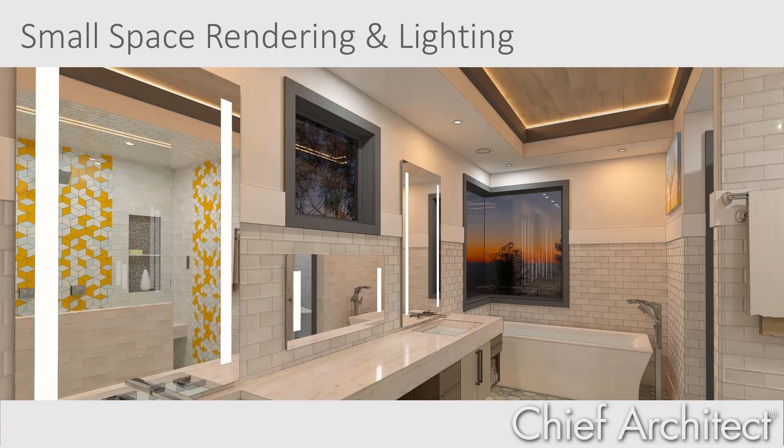In this session, I will cover how to visualize and render small spaces, and then how to use lighting in these spaces to achieve your best rendering results. The tools I will cover are the Floor Overview Camera, or what I call the Dollhouse View, Hide Exterior Facing Items - a camera setting that will hide walls and items attached to the walls, like cabinets, doors, and windows - setting the camera's field of view to be wider, and finally using the 3D cross-section slider.

I've opened up two different sample plans. One is a very small set of rooms, and the other is a larger house. I want to show you the differences as you navigate between looking at a larger plan and then trying to visualize smaller spaces, and how that may be different for just the smaller space itself.

I'd mentioned using the camera view tool, which is the perspective floor overview, what I call the dollhouse view. This camera allows you to tip down and rotate around and see exactly what is going on in the design. You can move between rooms pretty freely and tip the view to get the exact view you're after. Let's look at one particular feature in this camera setting as I move back over into the larger floor plan. We'll use the same camera tool and the perspective floor overview dollhouse view.

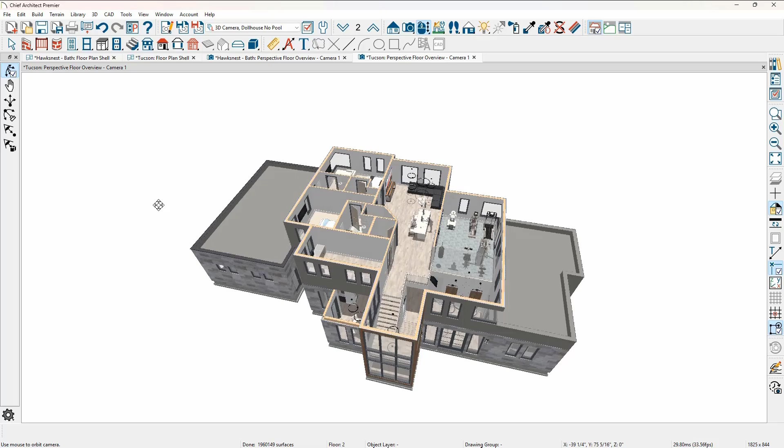Now I've opened up this view. It's on the second floor, and the default with this camera is to show the floors below. If you want to mask that and only see the current floor, I'll go up to the Edit Active View tool, and toward the bottom of this dialog underneath the Options area is the setting to show lower floors in the overviews. When I turn that off and close the dialog, this will mask out and prevent the lower floor from being displayed. You can see this is an open below room, and it's a setting you may find helpful as you're using the perspective floor overview tool.

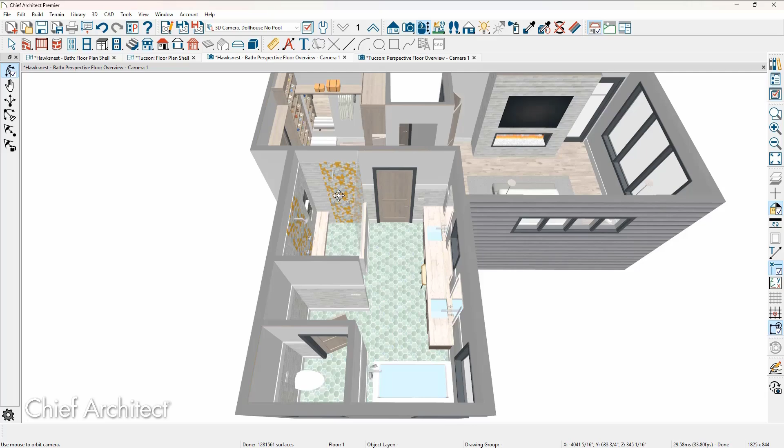Now the other setting in this camera, as we move back over into the small plan, is to hide exterior facing walls. Some of these rooms are pretty small. I have a water closet down here and it's pretty difficult to see into this space. So one of the settings you can use in the Edit Active View, again towards the bottom of the Options panel in the camera setting, is to hide the exterior facing items on those walls. What's going to happen here is anything attached to the wall - electrical, cabinets, windows, doors - will be hidden as you move your view around.

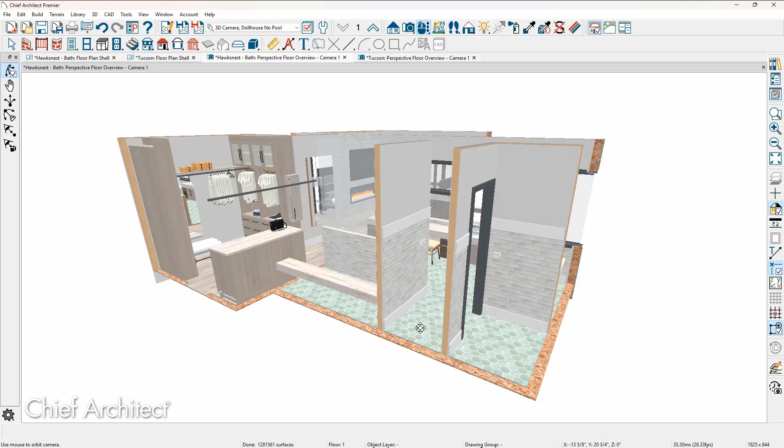So as I slide this view around, every time the camera is facing that orientation, the walls are hidden and anything attached to that wall will be hidden. If it's not attached to the wall, you may see something larger, like this cabinet over here. That's actually on an interior wall, so it's not going to be hidden.

It may also not be attached to the wall. So if you have something not attached to the wall, it might be a polyline solid or some 3D solid you have on there - it may not be attached. In fact, as I rotate around and look at the back of the bedroom set, this is a solid from the bedroom set, and it's not attached to the wall. Also, you see a couple of strands - these are LED lights and moldings. Those are not actually attached to the wall. You may need to put those on a different layer so they don't display.

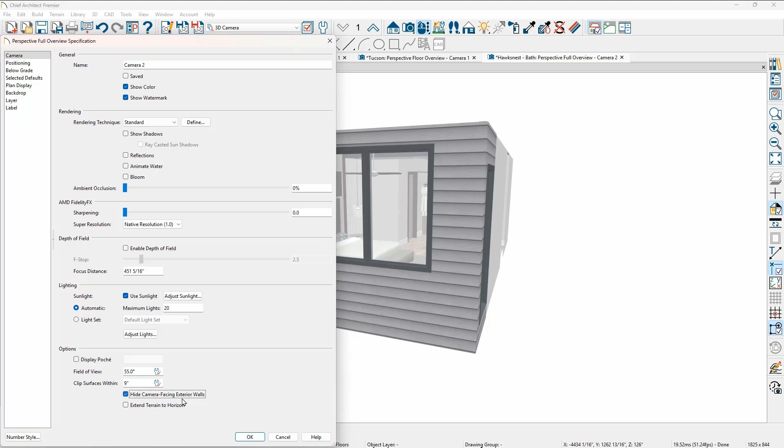Now let's go back into the floor plan view and use the camera that is the full overview camera. For this one, I'll make the same setting, which allows me to then see the ceiling. So back into the camera settings under Edit Active View, we'll turn on the Hide Camera Facing Exterior Walls. As I zoom a little closer in, you can now see the ceiling portion, and it has a little more context to what the scene is showing with the ceiling on.

Let's rotate around a little bit. Again, as I rotate the camera, anything touching the wall and attached to the wall will be hidden. Since I'm using the overview camera, you can see the ceilings in here, where it does have a ceiling. Some of these rooms have soffits, and so there is no ceiling over the top of it.

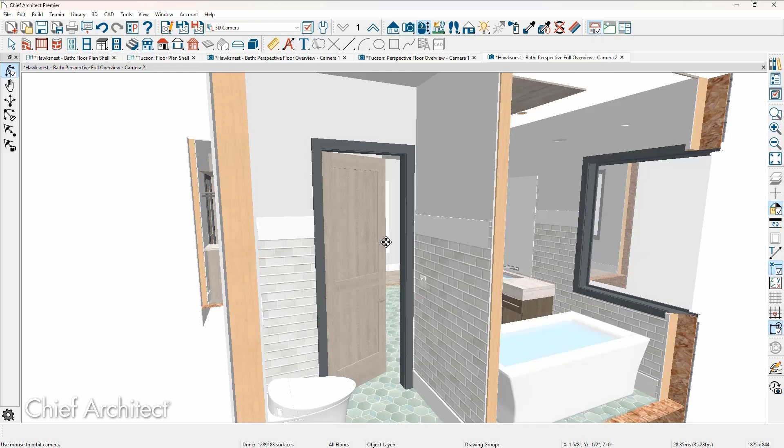And it allows you to be able to get right in there and see the view. If you want to do an export of this, you can save the camera as well. It will save those settings, and then you can capture just the right view for that room scene.

Let me close these views. I'm going to use one more camera, the perspective full camera. I'm going to come into the bathroom and click and drag toward the bathtub. In this session, I'm just using the standard render camera. I want to be fast and efficient with this. Now in the 3D view, I'm looking at the room scene, and it's a smallish room.

One of the settings you can adjust is called the field of view. Let's move back over into the floor plan view so you can see what I'm talking about. With the field of view, you can see the camera, and when I highlight it, there are two lines shooting out from the camera—that's the field of view setting. I believe my default is set, so let's open up that camera.

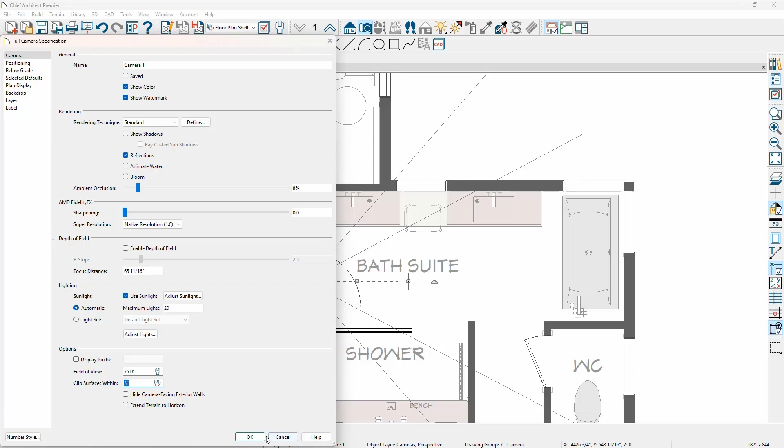I'm going to use the open object camera, and on the camera panel, I'm back underneath the options area. The field of view can be changed. My default is at 55 degrees, which gives you the display of those lines coming out. If I change the field of view, let's adjust it to 75, you can see the adjustment of those lines in the field of view.

When I double click on the camera, that will widen your field of view, and you may be able to see more into, in this case on the right hand side, the shower, and you may be able to see more of the mirror on the left hand side.

If I go back in, we can do the same edit. Let's use the edit active view and adjust that to maybe a full 90 degrees and take a look at what that change looks like. This is about as wide as I can make this field of view, and now I can see pretty much everything from the face of that door into the room. So the field of view may allow you to get the room scene you're after. The view might look a little bit distorted, but it depends on what you're after. The field of view setting can be helpful.

The next tool I want to talk about is using the 3D cross-section slider. In this smaller plan, let's use the camera for the perspective full overview. I find this camera setting, the cross-section slider, to be a little more helpful in larger plans, but it also works in smaller plans. Let's look at the camera view options, and the tool I want to use is called the cross-section slider. Let's just move that over to the side here.

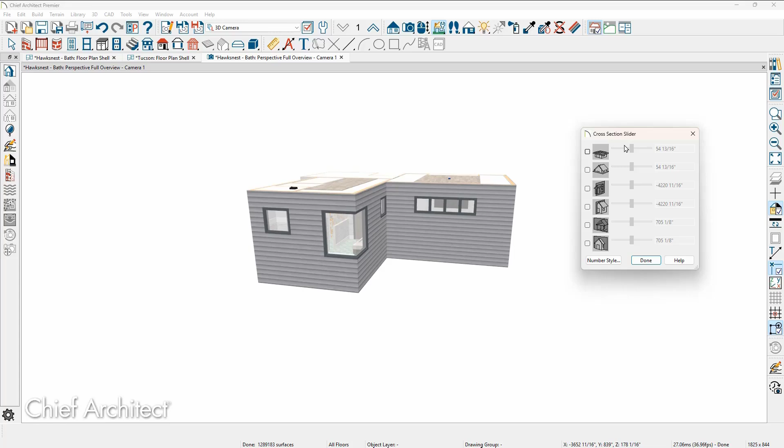This allows you to slice and dice the model in six different settings. I've just clicked the top one here, and then you can use the slider to adjust this—maybe you're trying to do a reflected ceiling plan. I'll click another one where we can pull that over, slide that around, and pull that back. Now with that cross-section slider, you can get right into the room or area you want using that slider. As you move and pull these apart, you can get exactly the room scene you may be after.

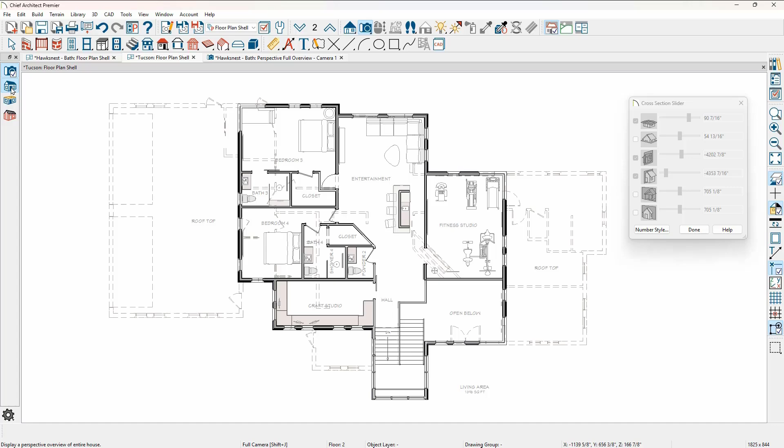Let's go into the larger plan and look at using the same tool. Now as I switched plans, notice the cross-section slider is still up. This is a persistent dialog, so it's modeless and will always be here until I actually close it. So let's use the same camera tool here—let's use the full overview camera. And here's our model, again with the cross-section tool slider.

Let's adjust that. We'll come up so we can see just the beginning of the floor plan at the top, then tip that down so we can peek inside. This is a nice tool I find useful on a little bit larger plans, but you still want to get in and see tight spaces. Again, each one of these settings, as you click and pull these around, you can make the adjustment and then see into those spaces. You can turn on different layers.

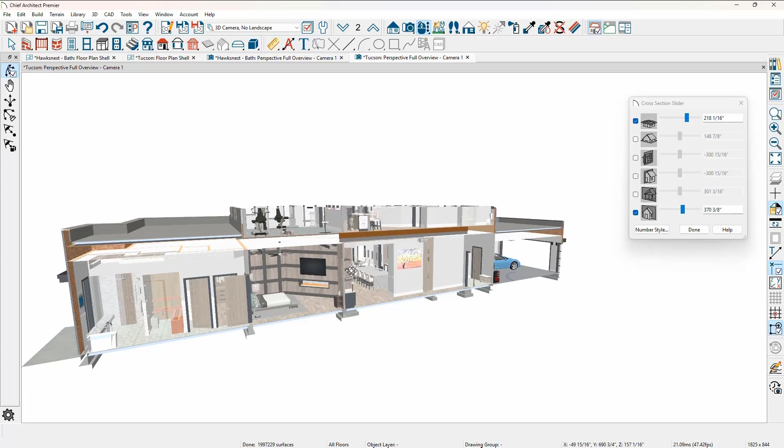You can see the cavity inside here. Turned on the framing, you'd be able to see inside of that with the framing turned on. It's all layer based and allows you to get just the right view using that cross-section slider tool.

Now there's one more setting I want to show you inside of the camera setting itself. As you're zooming in and getting really close to an object, let's see if I can get this to clip right inside the bed. You see how the clipping looks a little odd when I get close to that bed?

I like to take my camera setting and open up the Edit Active View tool. There's a setting, again I'm on the camera panel, underneath Options, for the distance to clip your surfaces. I usually set that pretty low, I'll set that to 1 inch, and that allows me to zoom really close to an object.

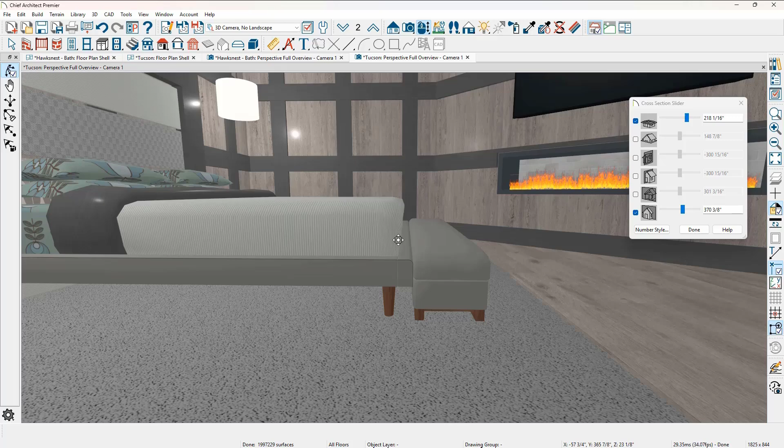Let's see if I can zoom in here and get a little bit closer to that bed, see how close I can get before it starts to clip. So I can get much closer to objects before it cuts inside of it. Especially like in a kitchen where you're looking at cabinets and you want to get close to an object, that clipping within 1 inch seems to be a good setting, and that's what I typically will set my defaults for my cameras.

So these are the tools that I use, and I'm going to go back into the floor plan. I usually create a layer set for all of my cameras. You can access these inside of the project browser as well.

As you come over into the project browser and you're looking at, I have the bath plan open, and here's my cameras for the first floor. You can access those. I sometimes turn these on in a layer set so it's easy to grab these cameras. I've got a handful of cameras in the bathroom, and if you want to peek at these, let's open up each one, and I'll close the project browser so we have a little more real estate. Let's open up the camera that is on the left hand side.

Let me double click on that, and that'll take a second. This is a physically based render to resolve the rendering. So I'm using the camera approach where I can pull the camera very near the back wall, and if you look at the Edit Active View settings, on the options you can see my field of view is 55 degrees and the clip surfaces at within 1 inch.

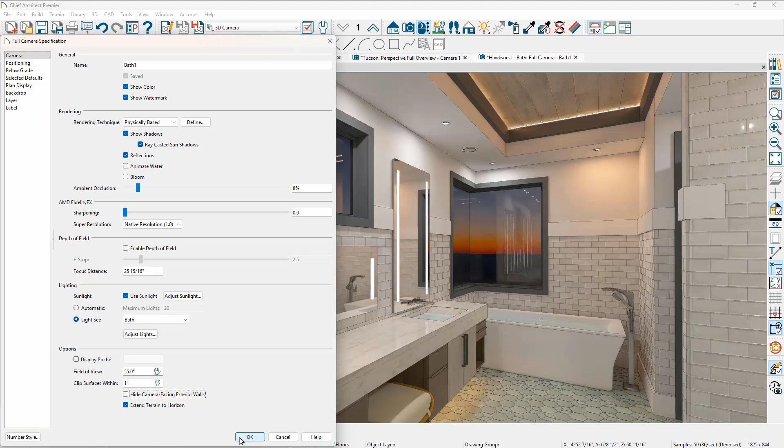And as I go back into the floor plan view, let's talk about that camera. You can move these cameras, and sometimes what I'll do is zoom in, pull this back, and make the adjustment. If I pull that back, you can kind of see where the field of view is going to start to intersect, and so I will use this and get it as far back as possible.

Let's grab one more camera. This one over in the opposite end of the room, it's pretty close to the back wall. I want to maximize the view.

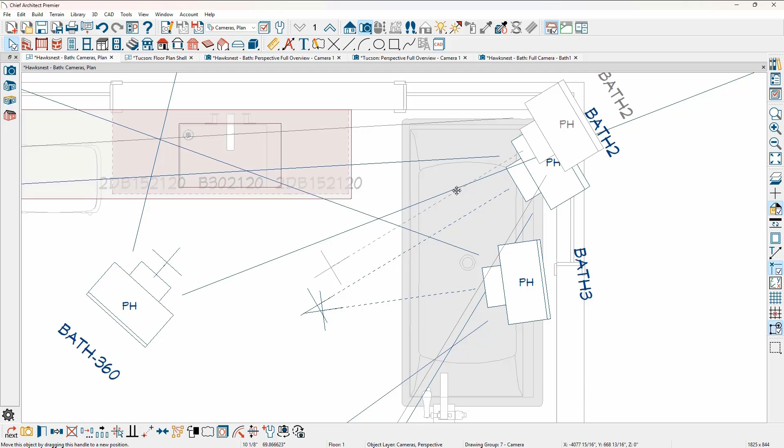To maximize that view, you can hold your control key down, or command key on a Mac, and get very close to the corner. That may be too close, but let's position this camera as far back as possible, then we'll open it up and that'll take a second to resolve. I can tell immediately based on the view, I'm still seeing part of the window, so the camera is too far into that corner window.

So to move that camera, you can use your arrow keys, the letter I to move in, so that will move the camera in. I find when I use those jumps that it moves the camera more than it needs to. So to get refined control, you can click on the camera, hold your control key down on a PC and command key down on a Mac, and that way you can position it if you just need to nudge it a little bit. We're still really close up here to the corner window.

Then when we go back into that camera view, we give it just a second to resolve. Now I'm just past the window. I might want to adjust the rotation here just a little bit to try to get the view around.

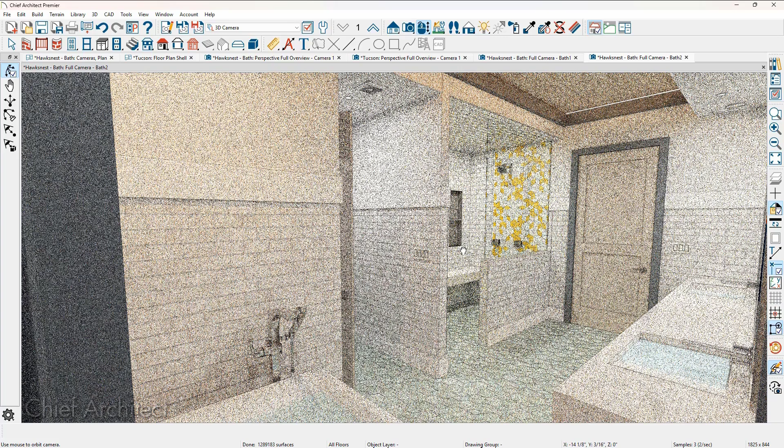I've got line drawing on, so it's a little bit more computationally intense. There's the view that I kind of want to maximize. You can adjust your field of view to help maximize your view. So those are all of the typical tips I use to try to get a rendering for a small space, and hopefully some of those will help you out.

As I shift gears and talk about lighting tips for small spaces, I'm going to do so in the context of optimizing for the physically based ray trace views. The same principles apply to the other views, like standard or clay ray tracing, but I'm going to focus on using these lights for producing the most photorealistic view.

The first thing I want to encourage you to do is create and use light sets. It's more important in a larger plan, so you can force the lights on for small rooms. Then make sure you adjust the light's intensity, the light color, and use area lights for non-light objects, maybe TV screens, fireplaces, etc.

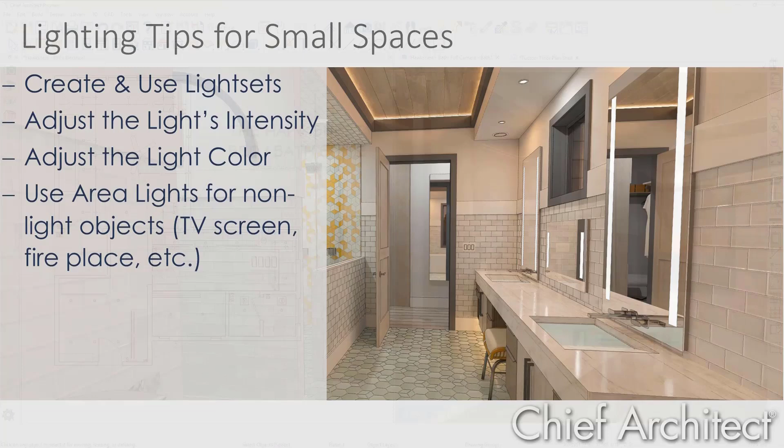In the split screen view I have open, the camera render is on the right hand side, and I have all of the electrical on the left hand side in the floor plan view. You can see most of the electrical in here. We have the recessed cans, lighting up in the tray ceiling, LED lighting below the cabinets, and also the LED mirrors. So these are the main light sources that are lit.

You have to have lights to get a reasonable 3D view, especially when using physically based ray tracing. If there's no lights, you're not going to see much in this room at all.

So I've done the electrical plan work in here, and as you zoom in and look at these items, the first thing I want to talk about is using a light set. Let me just click on this camera and use the open option.

On the camera panel, down in the lighting category, I'm not going to talk about sunlight so much, I'm going to focus more on the lighting information. Many of you probably use the automatic light setting, where you can set the maximum number of lights. This plan isn't overly large, but there are still probably several hundred lights in it because of the LED rope lights, which may have lights every inch or every 3 inches or some other interval. By the time you add those in, you get a lot of lights.

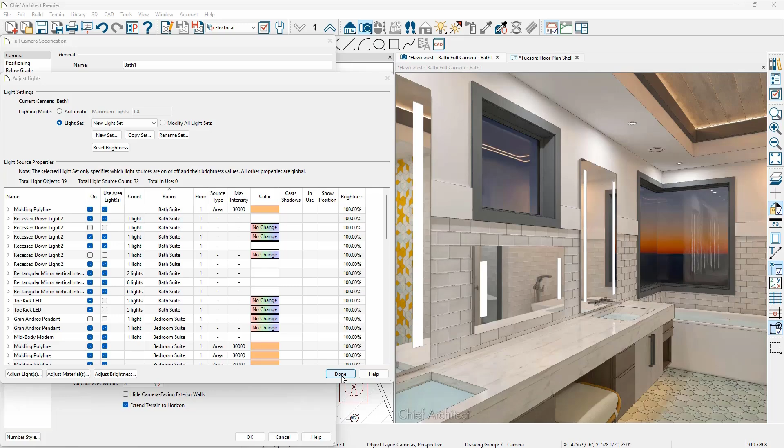So let's close these dialogues, and I'm going to maximize the 3D view here. And I'm going to begin with the light intensity, and let's just double click on this recessed light right here, kind of in the middle of the ceiling. And I'm going to come over to the light data information.

On the light data, there's a few settings: specify as light, use area lights. I'm going to talk a little bit more about area lights here in a minute. The light intensity for this light is currently set at 1200 lumens.

So I can adjust it. There's a drop down of different settings, and depending on how many lights, how high your ceiling is, you can choose the different setting. You're not restricted to these numbers - you can always type in a number exactly over here. If you wanted to have 1080 light lumens, then you can type in the information.

And then immediately below this is the color hue. Now I clicked on the light, kind of slide this over a little bit. I clicked on this light over here and it's white. Now if you look pretty closely at the view, if you can tell this on the stream of the session here, this light is not white. I've colorized it slightly.

Don't ask me why, but I felt like it was maybe a little bit more interesting than just having white. So for the purpose of the session, I've changed that to have a light orange hue to it, so it's casting a different light. The way you change that setting is right here. So you can come over here, you can make the adjustment, and if you wanted to yellow it - I've been using kind of a theme of orange - so I can make the adjustment in here.

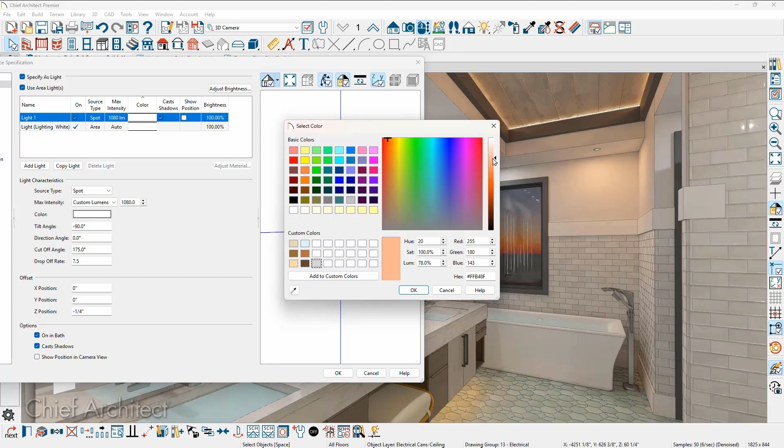We'll make this adjustment, let's make it a little bit more orange so this shows up. And I've now tweaked the light color. We'll see this when we close the dialog.

Now there's other settings in the lights that I'm not going to really cover. There's a help option down here, but your tilt angle, the direction, the cutoff angle, the drop-off rate - how much does the light drop off from the source - and using the help option down here will give you that information. Sometimes for troubleshooting you can kind of see where the light source is. Right now there's an offset of 1/4 inch, so the light is actually being produced from just below that. And if you turn this to show position on in the camera view, you'll see it in your 3D view.

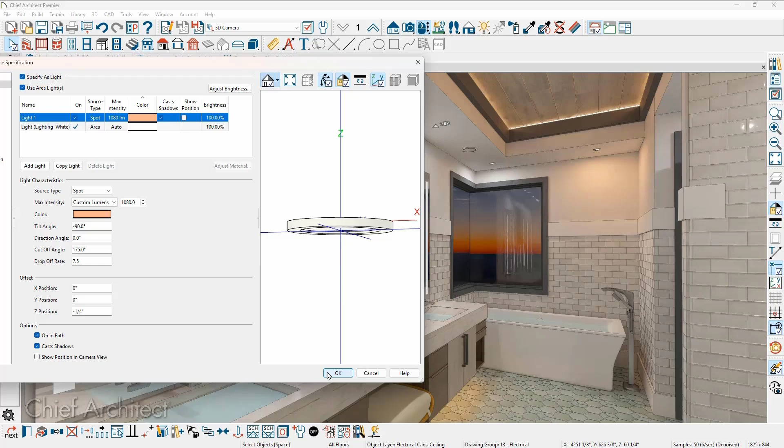Sometimes helpful in troubleshooting, especially if you have a long chandelier with multiple lights in it—it can be helpful to see what that is. So now that I've reviewed changing and setting the light intensity, one of the keys is when you take a 3D view, see how bright it is, and use that feature. Let's click OK and give that a minute to resolve.

You can also adjust the lights through a process called dimming. You can click on the light and dim it. I'll show you this—I know this circuit, as we look at the electrical over here, you can see it's actually using a circuit connecting all of my recessed cans along that section of the room. It's not hugely significant, but from the floor plan view I can click on that circuit. Difficult to see, but it's the switch on the left up here. Through the bottom edit menu is 'adjust brightness,' which is effectively like using a dimmer switch.

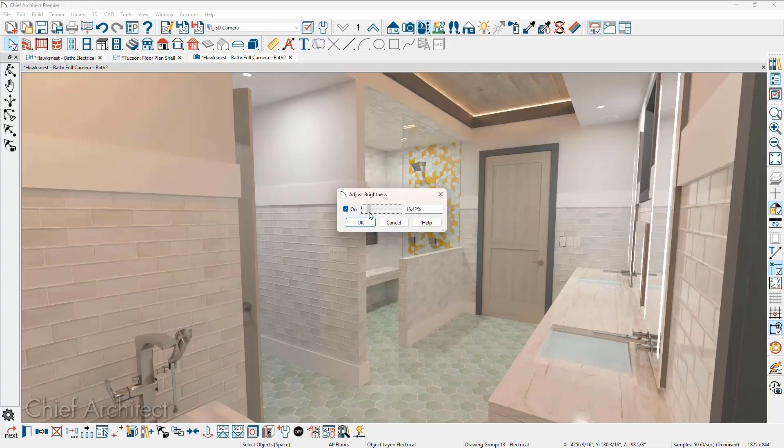If I slide that over—let's slide it down quite a ways so there's not a lot of light coming on—click OK and give it a second to refine the view. Once that's complete, the lights in this recessed bank up here are much dimmer than the other lights, which may help get the right scene. It's a nice way so I don't have to go into each light and tell it, instead of being 1200 lumens, it's 800 lumens. Using that dimming option can be fast, especially if you've gone to the effort of creating a circuit. So let me switch gears and close this view.

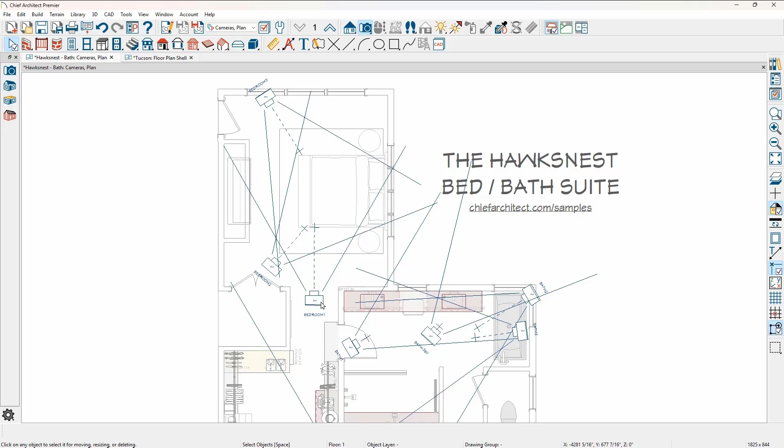Let me open this sample plan—I'm going to open a bedroom camera that is using some area lights. Let's double click and open this camera up. In this scene I'll point you to a few things that are area lights. One is the fireplace, which is using an area light and emitting light. The other thing emitting light that may not be as obvious is a vertical rope light.

Sometimes I get the question: how do you create a vertical rope light? Because the rope light tool, the electrical tool, typically only goes horizontally, which is what we may have up here. Sometimes you need the capability to create a vertical rope light. What that is, is a solid, and I've taken the materials and set them to be emissive. Let's explore that a little bit.

I'm going to use the Adjust Material Definition tool and click on that light, which again is a 3D solid. As we open that up, I'll go over to the Properties panel and point you to the emissivity setting. When you drop this down, similar to the lumens setting we looked at on the light, there are some predefined settings, and you can also type in a specific value for that information, along with some other settings you can learn about in the help file. So I've taken that material, which is just a simple orange material, and named it Lighting Orange because I want it to emit light.

On the Properties panel, I set it to an emissivity of 30,000. You may need to play with that a little bit and dial it in for your settings.

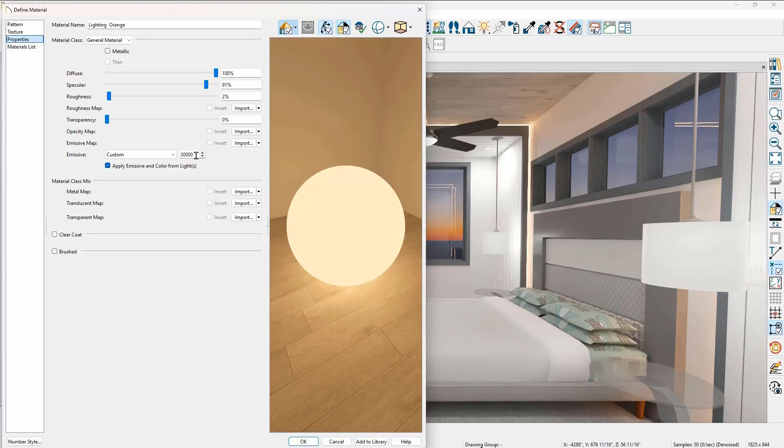Let's look at the fireplace, using the same Adjust Materials tool. I'll click on the fireplace over here. I've taken a 3D solid and used the image Fire 6 material name and painted that, and the emissivity of that is pretty low. Compare that to 30,000 on that vertical light, it's pretty low.

So I might mess with this a little bit, and let's crank it up so that we're cooking with gas here. Let's take a look at the effect on that room scene. So as that resolves, yeah, that's a bright fire. So the emissivity, that's actually emitting light.

If I were to turn off the other lights in the room, you're going to get quite a glow. It's a function of how many other lights are in there, and you're going to get quite a glow from the emissivity. It can be a nice effect using that area light for non-light objects.

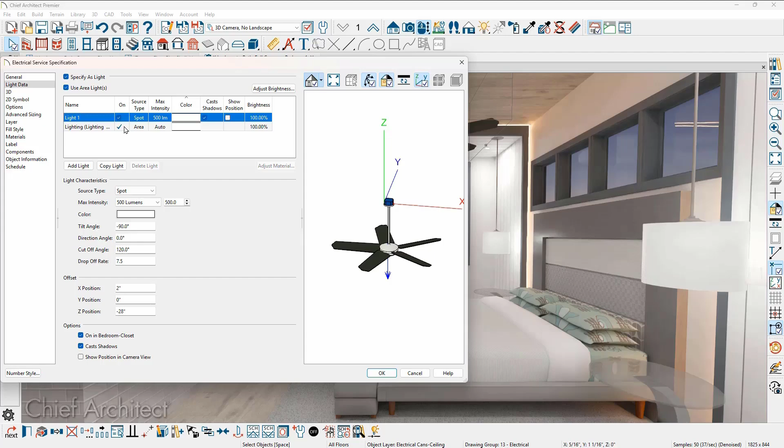Other light objects can also emit light if we pick on this fan light up here. This light is set up to use the light itself of 500 lumens, and it's also using an area light. Let's look at this again, 500 lumens, but the glass below it is an area light as well. If I go over to the materials, the materials are made up of several things.

One is this lighting glass. Let's select that material, and then I'm just going to use the edit button and look at this material. It's called lighting white, and over on the properties, it's applying the emissive color from the light itself.

So that means because that light was set to 500 lumens, the light data controls the amount of light in the area light, the emissivity setting based on the lumens. That's a nice setting. I usually don't override that and just let the program manage that for me.

So that wraps up the session that I have. Again, using lighting is really important for your room scenes. Remember to set the intensity, the color, and then for any of your rooms, build a light set. It just forces the program to render it.

Finally, area lights can add a little something extra into your renderings. Hopefully you'll find those tools helpful as you render your spaces, and in particular your small spaces. Thanks for watching.

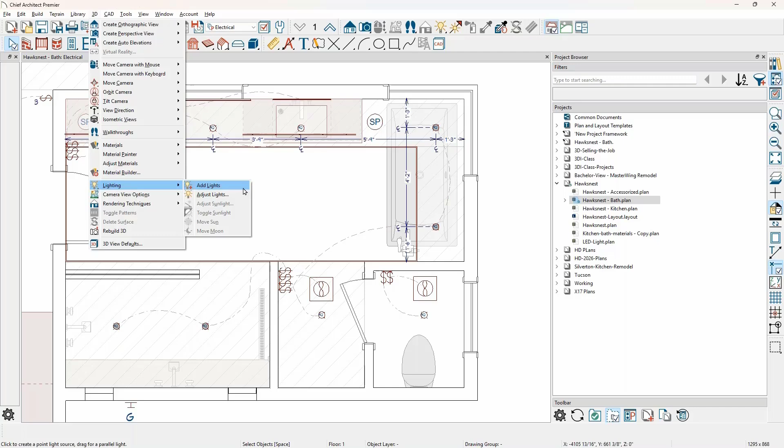Gosh, where is that? I haven't used one in a while. So underneath the add lights, I'm in this mode here, and this will produce a light. Also, if you click and drag, before you release, it will create a parallel light. But let's just place a regular light here.

And so this is a light. You don't see it in 3D, but it has all the typical settings. If I open that up, you can go into the light data and specify lumens and all of the light information as you typically would for a regular electrical light.

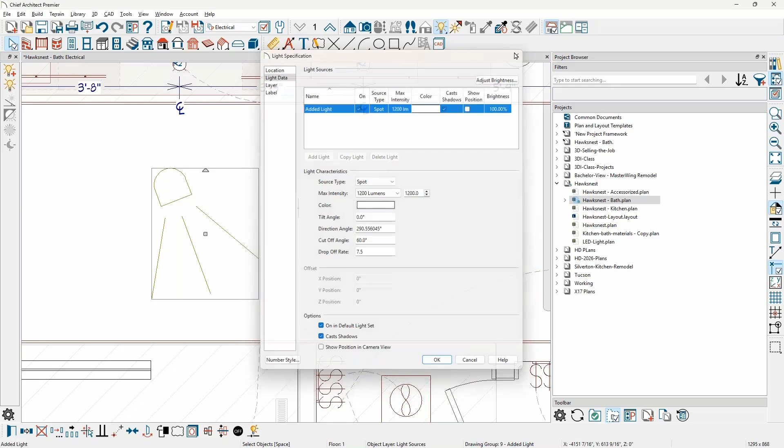I don't really use these anymore. I used to use these quite a bit for a scenario in what was called CPU ray tracing, but we've kind of gone away from that. Let me see if I have a good example here. I've gone away from that because I don't have a lot of need for those kinds of things. Let's see if I have it.

It was more of just like, hey, if you're telling us best practices, it seems like the answer is do real lights. Yeah, I pretty much use real lights, and I was trying to see if I had an example here.

While you're searching, I'll kind of hit my second one, which I think I know the answer on. I know when you're doing real lights, they all have dialogues that you can check a whole bunch of stuff. But when you do a panel light, that's what it was called, right? Like if you're going to make a TV be emissive.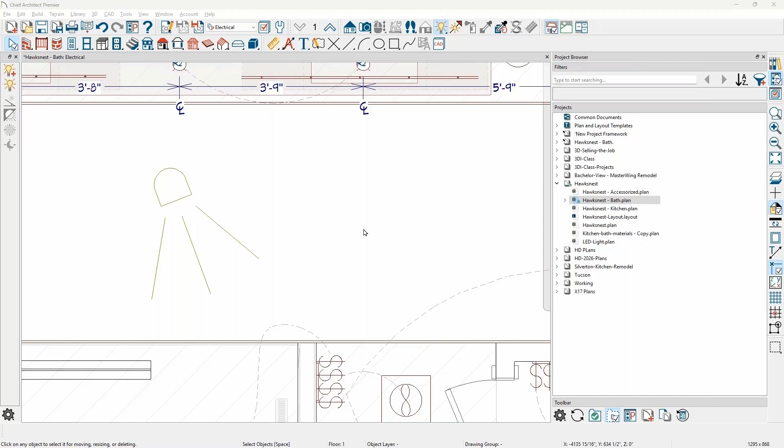Oh yeah, so yeah. Do they have a shadow casting option the way normal lights do? Let me open up this camera and see if I can open that up. Well, I'm not going to be able to find my other picture I was looking for.

Okay, so I don't really have a photo on that TV, right? And if I go in, let's grab a photo real quick, and let's see here. Or even the fireplace, yeah.

So if you click on these things, the main thing you get with the emissivity is the amount of lumens. So that's what I can control with that. Now there's some other map settings, but for the emissivity, this is what you have, is the ability to set a value for the emissivity.

So even if it's set to a super intensive emissivity, it doesn't cast a shadow. Right, okay, all right, cool. That's what I needed, thank you.

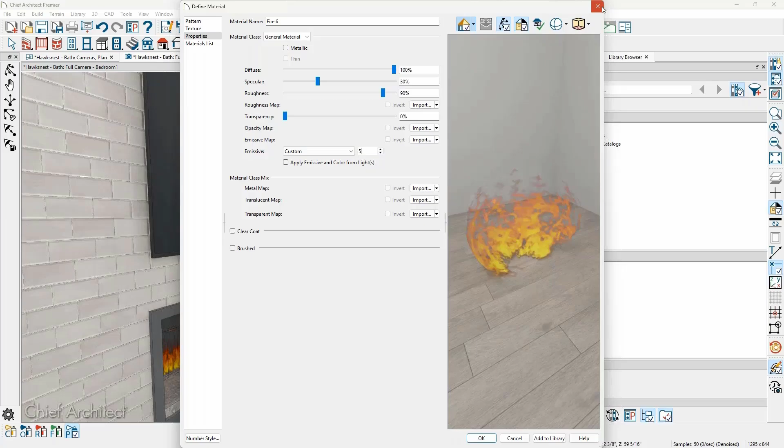Back to the light source question, I have a follow-up question on that. What is the trick to actually selecting that when you're in a room and you want to change it, or change the values of it? My experience has been that I pretty much have to delete everything that's on the floor to try and select that light source. I can't get to the middle of it, and it just wants to select anything else that is in the plan.

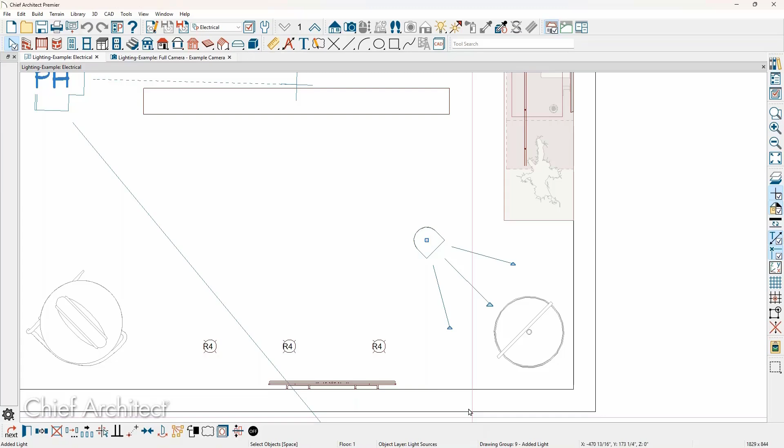So Anne Marie, are you talking about being able to select this light source right here? Exactly, yeah. Let me pull this over here. So I have a kind of lighting example here, and this was the one I was looking for, I think it was Brandon that called in. So I've got a couple of light sources here. One is just a light source that's in the corner, and one is casting a shadow from the light source. So sometimes it's difficult to select these. That one I happen to get easily, but when I move back over into the other plan here that I had open, it may be difficult to select it.

So I drew a marquee around it to select it. I also will simply go into the layer set and turn on the layer set that says all off, and then make sure I type in light sources. I've got some other things turned on, and now I can get it. Oh perfect, okay, does that work for you?

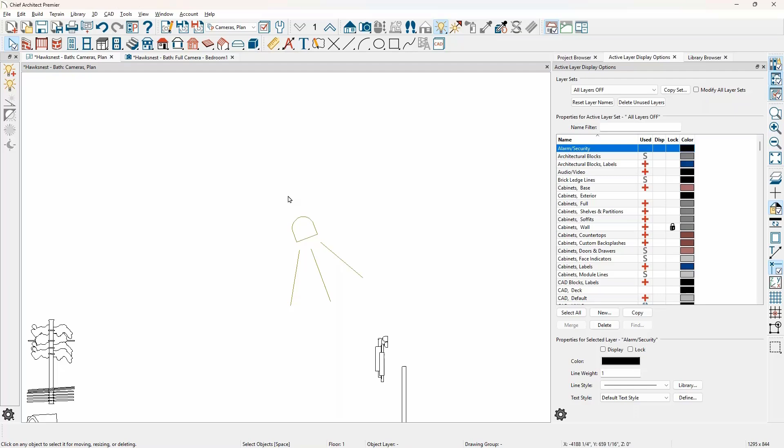Yeah, that helps. They can be hard to select. Yeah, I was doing a kitchen and I had a couple of light sources over an island type thing, and it was impossible to select. Yeah, it can be. So I use that all off layer set, and then I just turn things on and off as I need to. Okay, perfect, thank you.

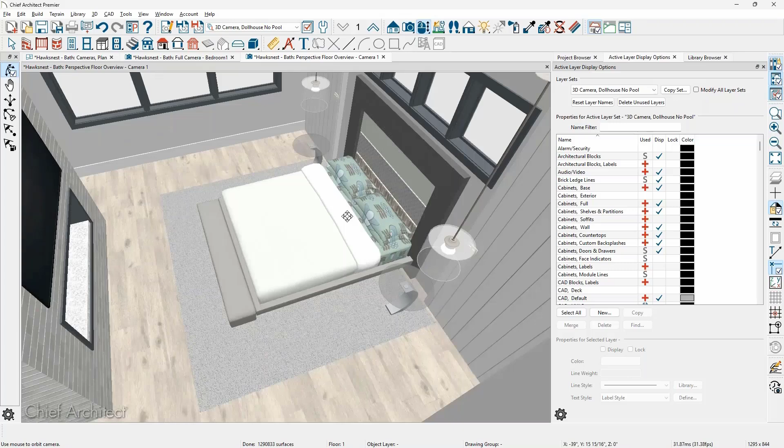So in this camera setting, when I click anything attached to this wall, if you peek inside this wall, there may be some electrical. There's electrical on the wall, right? So when you turn that camera setting on, which is under Edit Active View toward the bottom, hide exterior facing items, anything attached to that wall will then turn off. Now I'm using version X17, so there's a disclaimer for X17, and we have updated that camera to make sure that anything actually attached to the wall - picture frame, electrical, doors, windows - will also hide as that camera view is rotating around.

Okay, I'm using version 16 and I'm on a Mac, so I don't know if those are also factors. Yeah, we won't hold using a Mac against you. I too use a Mac.

No, we did enhance this in X17, and part of the enhancement is whatever is physically attached to the wall or inserted into the wall will hide. I believe there's a niche over there in the shower, and as I rotate around, that niche is also hidden because that's considered an opening.

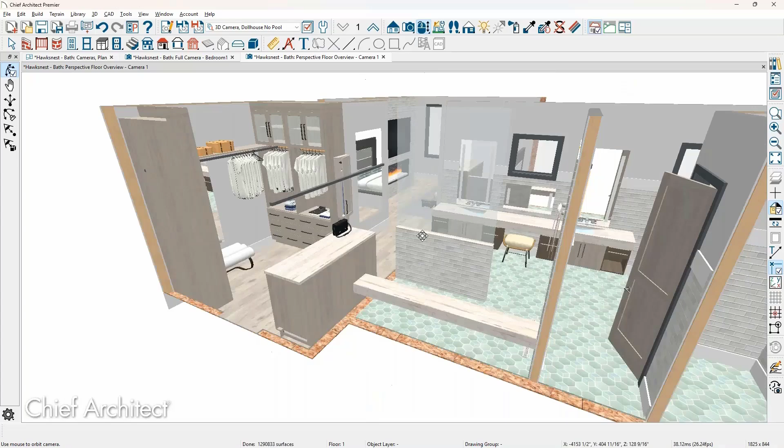Okay, I see. So check that out in X17. It's available for beta release, it's in digital lockers now. So if you have access to X16, you should also be able to access X17 and download it to take a look. Will do, thank you so much.

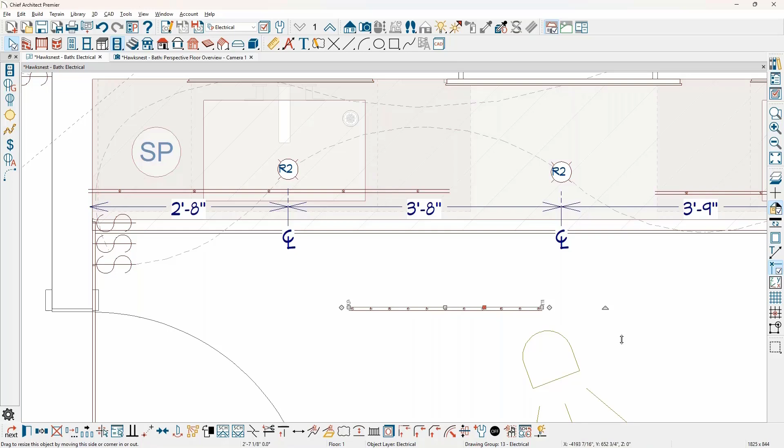That is going to default to my default settings for the electrical. When you open this up, it's going to have a height, in this case off finished floor. Let's just put it up at, let's say, 48 inches. And then distance between lights, I usually space that out a little bit, so that's now kind of right in the middle of the room at 4 feet. Does that make sense? Let's take a peek in here. Okay, so you're all good with that, right? Yes. Okay, so yep, there he is. And then I think the other question was maybe vertical lights.

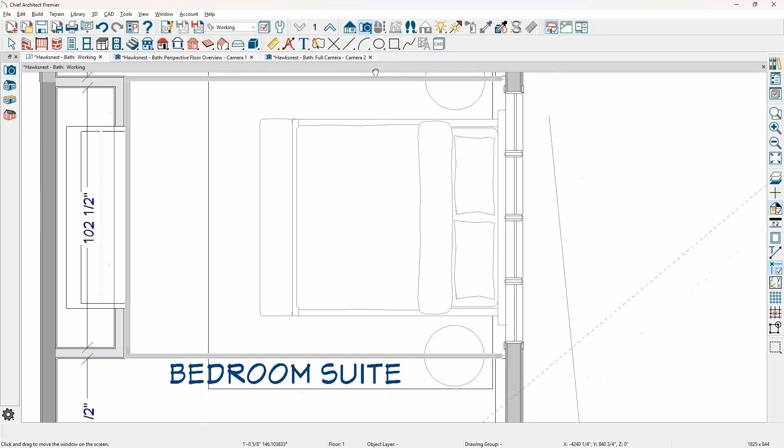Was that fair? And in your tray ceiling, getting your light in the tray ceiling, is it just a matter of making sure you've got the right height and then the distance from the wall?

Okay, so if I open up this, in that room I have the tray ceiling, right? And if we open this up, you can see the height of this is 120 inches. Now if you click inside a room, and let's see, this is a room, yeah.

If you click inside of a room and use the automatic tray ceiling tool, you're familiar that you can add a rope light through that tool? So if I just click and make a tray ceiling in here, in that little tiny room, there is rope lights, and you can go through and add the rope light, and it will give you the offset information. So if you wanted to pull it down right below the molding, you can do that as well.

And so that would be embedded with your tray ceiling, and you would access that through your tray ceiling object itself, then go to the rope light settings, and adjust the horizontal offset and also your lighting information. When you click on edit, it's the same kind of information - the amount of lights, the light data, all those things you access through there.

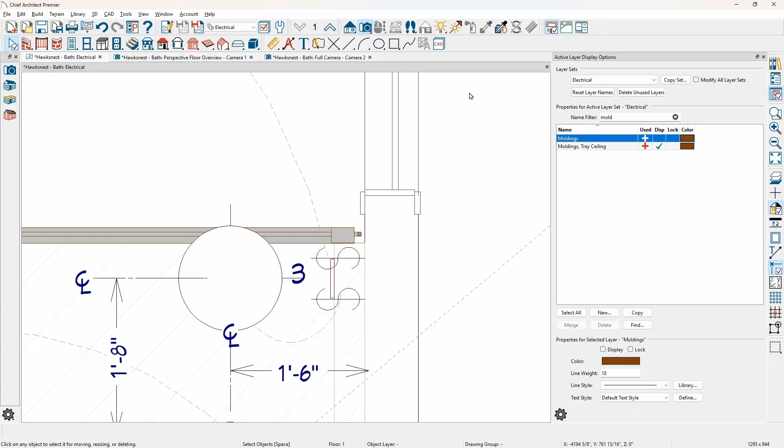Now, I had free drawn the rope light in that tray ceiling, okay? And the other thing that I did in this scene, let me turn on my other moldings so you can see these. Let me just take a simple 3D view of this room so we can see what we're talking about.

Okay, so you see that little orange light that's kind of enclosed by the molding there? I'm in a standard view, so this isn't that pretty, but I want to show you that all that can be either a 3D solid or a molding. And the key, once you've drawn it, is to then set the emissivity of that material. I've got that cranked up to an emissivity setting of 30,000.

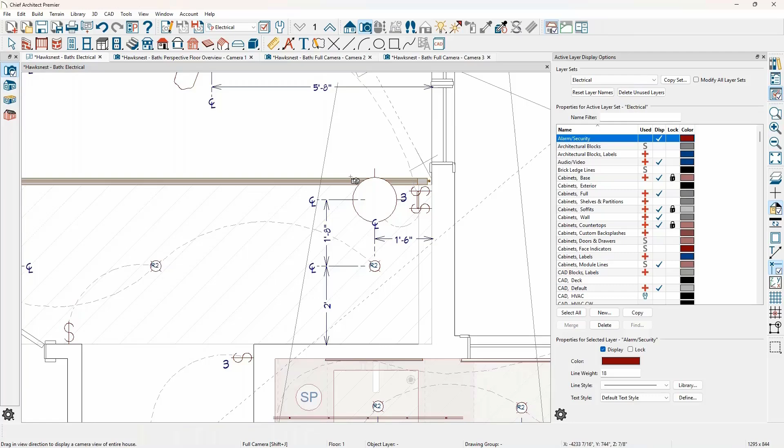Are you comfortable with knowing how to create something that would look like that? Yeah, I've created 3D objects before. Okay, so I'll just show something real simple.

If I create a 3D solid, let's just put something in the middle of the room. So I just drew a rectangular object here, which is a solid, and we set the height of that to be 66 inches, floor to bottom. I've got this - let's go back into the view and see if we can pull that over.

Okay, so I've got this great big solid. Probably not good to have a pole near the end of the bed, but okay. So now I can take that material and spray it on there. Let's go out to our library here and grab that.

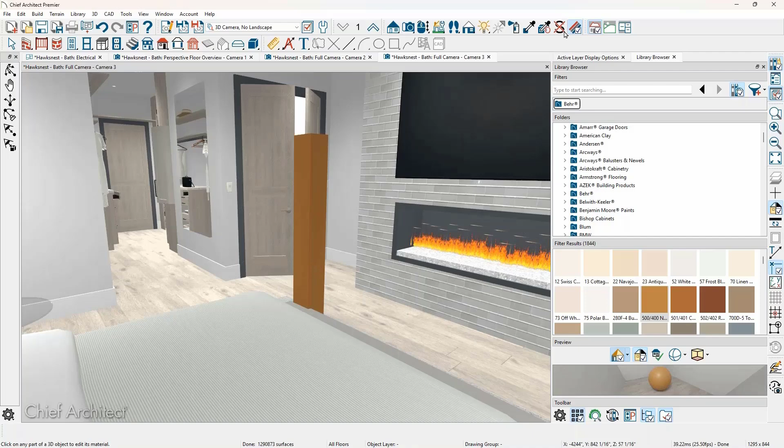Let's say, for example, we came into our manufacturers and grabbed a paint from Behr, and we'll just grab this paint and paint that to be this color, right? And then I can mark that color to be emissive on the properties panel, and we'll just set it to be something like that.

And then when you take your 3D view, you're going to have something that's very bright. Again, I'm in the standard view, so that would look much different than if we were in the regular ray trace view. Does that work? Yes, thank you so much. I appreciate that.

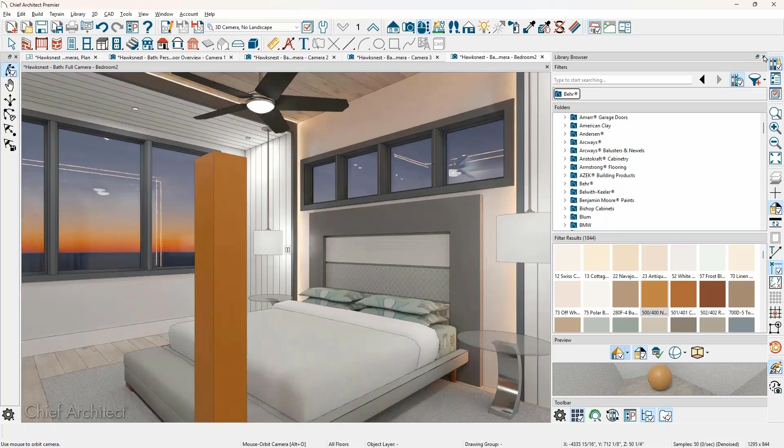I'm not sure I have any magic answers for that. One thing I do with my cameras is once I feel like the camera's dialed in, I delete this gigantic pole in the middle of the room, and once it's dialed in, I save the camera.

There's a setting in your toolbar that says Save Active View, or one next to it that says Save Active View As, so you can make a copy. Then I get into the habit of naming my camera and setting all the define options.

Now let's say I've moved this camera around or made changes to it, rotated it a little. So I've changed the camera and made some settings changes. You can reset the camera view since you last saved it. I've added this tool on my toolbar, Reset Saved Camera, and you can also access that up in the 3D menu.

Under Camera View Settings, I'm looking for Reset Saved Camera. There are really two tools here: reset all your settings, or just reset the position. When I use the one I put on my toolbar, it repositions the camera.

Now if you've made settings, saved your plan, closed it, come back the next day, and realize you didn't save it, I'm not sure you have a lot of options. You could go into your archive file, see if you had a previous camera saved in there, pull that camera out, look at it, and copy it back into your plan. That could be an option.

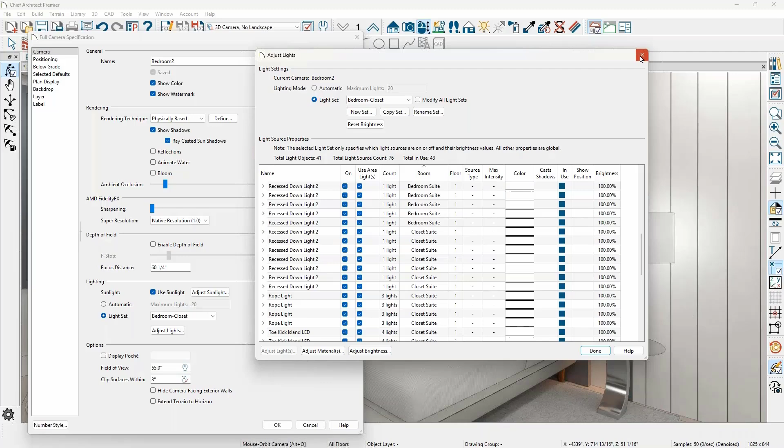That opens up the dialog, and in it you can sort a few different ways — by room, by floor, and so on. Then you can come down and pick and choose which lights you explicitly want on. That's really the safest way to make sure all lights are on in a room, because I can sort by room and make sure all the lights I want are on, and any light I've turned on in that scene will be on or off exactly as I want.

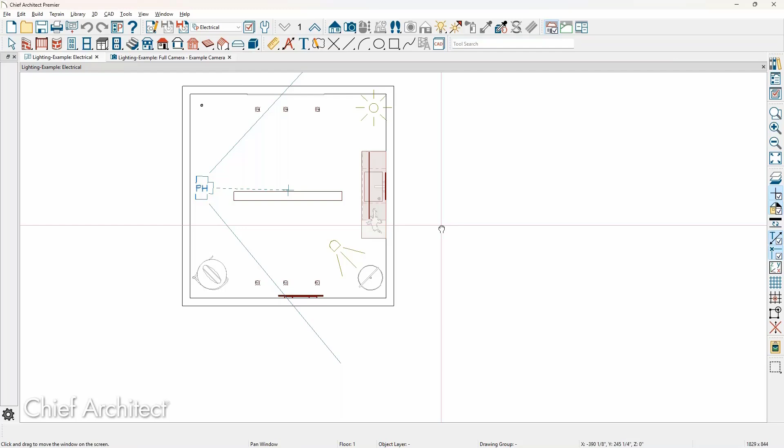If I take this simple room that I had open earlier, right? Let's just open this up. If I click in the room, of course I don't have a roof in here. Let's build a roof real quick. Gosh, all this stuff, automatic roofs. Okay, build the roof. Now when we go into the room and I remove the structure out of it, it will force the ceiling to go up.

The lights should follow the ceiling, right? And if you've drawn a custom ceiling, lights also should snap into that. Now, the one thing you mentioned is you now have this room divider where you have an open-to-below room, and there must be something to that process that's causing the light maybe not to follow the appropriate ceiling plane. You're welcome to send that in, and we'll take a look at it.

I've noticed when I have a 2-story, like maybe a stairwell, and the second floor ceiling is vaulted, I have to be careful to go to the second floor and place my lights instead of placing them on that first floor. Even though there's no ceiling, the lights don't know to jump all the way up to the vault on the second floor. So is it possible that's what's going on?

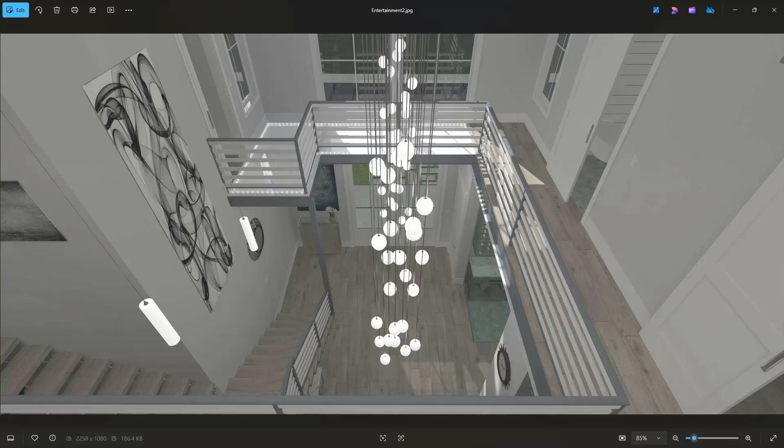Okay, and then just a follow up to Ashley's question about interior doors. Well, she asked specifically about doors, but not specifically on interior doors. If I have a really small bathroom, let's say a powder room, half bathroom, and I'm trying to get a render in that space, sometimes I'll pull my camera back and I'll even make the wall invisible, the interior wall that's on the hallway. But if there's a door there, it's not making my door invisible. So has that in the new features of X17 been addressed at all?

So that view that I had up on my screen, let me just grab this. This view that I have up on my screen here - this is a powder room in the middle of the floor plan. So I've done two things to get this view. Hide exterior facing walls is what it says it does - it hides the wall if it's exterior to the house. Well, this wall is not exterior to the house, right? It's interior to the house.

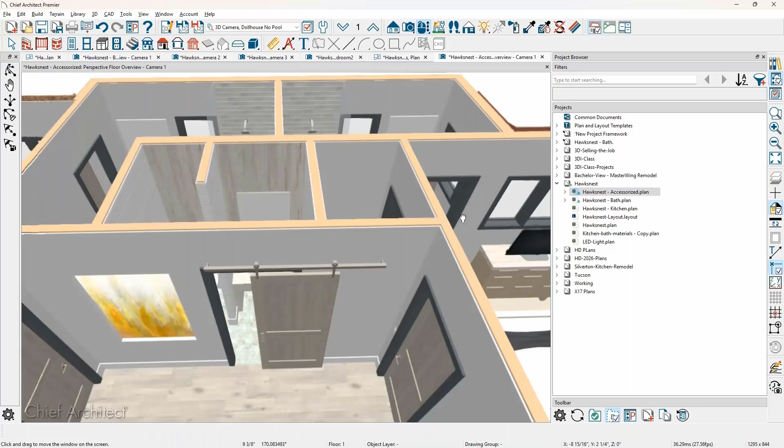So what I've done here is I took this wall and let's just kind of peek down in here - I put the wall to be invisible. So you click on the wall, turn it to be invisible. Well then you're left with anything else on that wall, which is kind of why there's also a setting that says hide exterior facing items, and it will hide any items on there, including the electrical. So when I click on this wall and toggle it to be invisible, well, the door, I think is what you're saying, is still there, right? Yes. And let's just kind of toggle that. There we go.

So there it is, right? The wall's invisible, but the electrical and the door are still there. What I've done to create this view is put those items on a layer, like doors invisible, electrical invisible, doors layer 4 invisible, whatever you want to do, and then turn the layer off. It's not maybe the most elegant solution, but that's how you can do it. Does that work? Yes.

Thank you. And a really quick question on the lights. Is there an option to adjust Kelvin temperature, like 2700 Kelvin or 4000 Kelvin? Is that an option as of yet? There's no Kelvin setting. I'll pause here if anybody wants to weigh in on it.

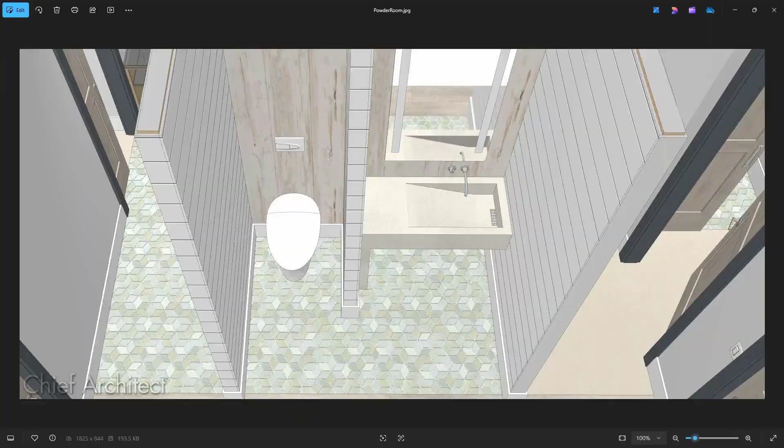Basically what I end up doing on my light, let me go back into the electrical here. What I do for my light information is open up one of those lights, and on the light color itself, go in and look up the Kelvin information. I'll pull that over onto my screen, and then use the eyedropper to apply that temperature setting onto it. Now I'm going to pause here and see if any staff members or anybody wants to chime in, if you have a better way of getting the temperature setting for the lights inside of this color setting. Anybody out there want to weigh in on that?

That's probably the best way to do it, although this is a frequent request, and it's something we may get to sooner than later. Yeah, I'll leave it at that.

So Lisa, just pull over your Kelvin chart that you have and then use the color eyedropper and pick it in there. You can also save those colors if it's a certain color, save those colors in your library and then you have access to them. And then you can name them, 2700, 4000, 6000, whatever they are, and then you'd have access to them. Great, thank you so much.

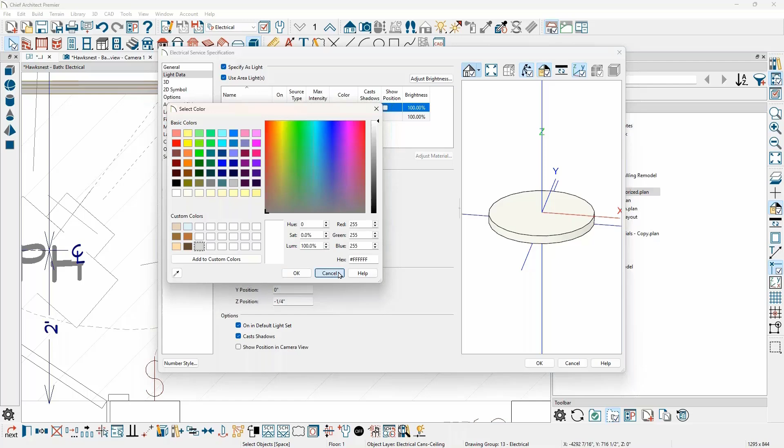Thanks, Scott. We have Bethany here. Go ahead and unmute yourself and ask your question. Hi, Scott, thanks for being here today. I'm coming from Portland, Oregon. Okay, I have a question about...

So you've talked about how some lights will work and some won't. I've gone in and adjusted the amount of lights that can be on. I've played with the settings, and for some reason I can't get certain lights to come on, even though it's saying that all views are usable. So do you know why that might be?

Are you using a light set? I have not. This is the first time I have heard about using a light set. Yeah, so that is something that I would like to play around with. So I would use a light set.

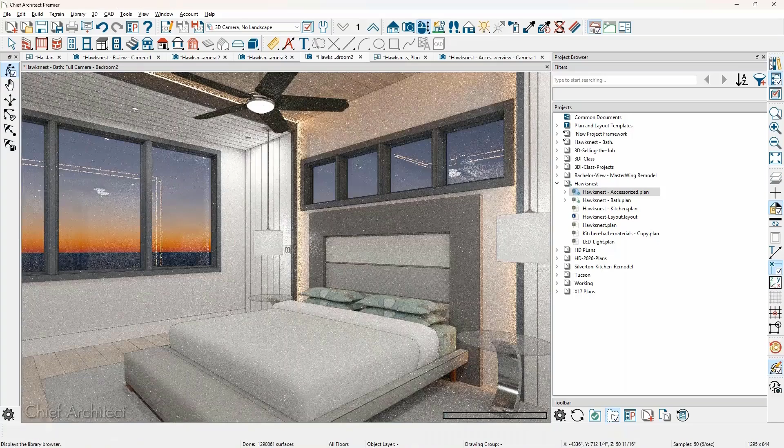I kind of zoom out here. We've been talking about this plan. I've got a bunch of electrical in here with rope lights and all the different lights, and when you open up these views, there's just a lot of lights in here. And if you set the number of lights to a big number like 100, it still might not turn on these lights in this room, because the program is thinking it's smarter than you are. And maybe it is, maybe it isn't.

Make sure you just use a light set and then you can force it. Again, that setting underneath your camera is light sets, right, adjust lights. Make sure you're using a light set, and in there, go in and make sure you forced it to have those lights on.

Yeah, so I did try, even though I haven't created a custom light set, I did go in and click on light set and then clicked adjust lights. And it says that the light is on in all views, the lumens are set higher than 0. So right, I'm just confused as to why it would still not be turning on.

Well, just verify, Bethany, again. Once you've got your camera open - I've got a camera open here - go into your camera panel, and at the bottom down here, make sure that the light set is checked, and that we ship with a default light set in the program, right?

That's usually the only one you're going to see. Each time you do a new plan, you need to do these because your plans change. But if you're using the default light set, sometimes I use this light set because usually every single light's on in here. So once I click that and it's done, I know that every light in the plan is going to be turned on. Maybe not very efficient, but I know every single light will be on.

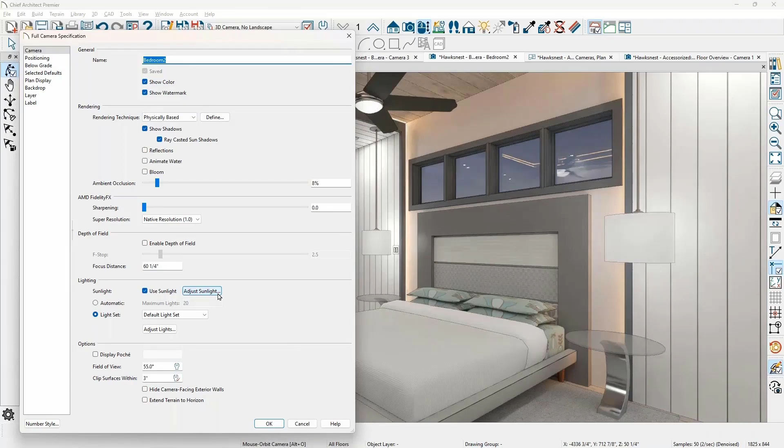Adjust sunlight. Right now, I'm using a generic sun, and I like to adjust the generic sun without respect to what the real world is. You can see my tilt angle is pretty low, 4.24 degrees, and then there's a direction angle.

So when you're in this view, let's mess around with this a little bit. I can actually click on the sun itself, and let me turn off line drawing because it's taking a little bit longer.

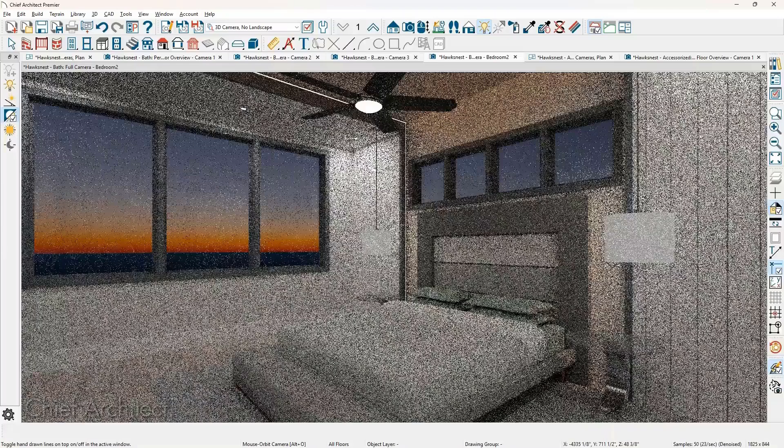So I'm going to move over. Do you see where the sun is on the left-hand side? Yes. So it turns out you really can move the sun. What I'm going to do is click and drag up. You see the sun coming up?

So this is not what is happening in the real world. It's kind of fake positioning of the sun, right? But it's pretty nice to be able to adjust the sun.

Well, why isn't it blowing out the rest of my scene? I've seen this before - sometimes the scene will get blown out where it looks like nuclear winter outside. Have you ever seen that? Yes. Okay, well, a couple of things you can look at.

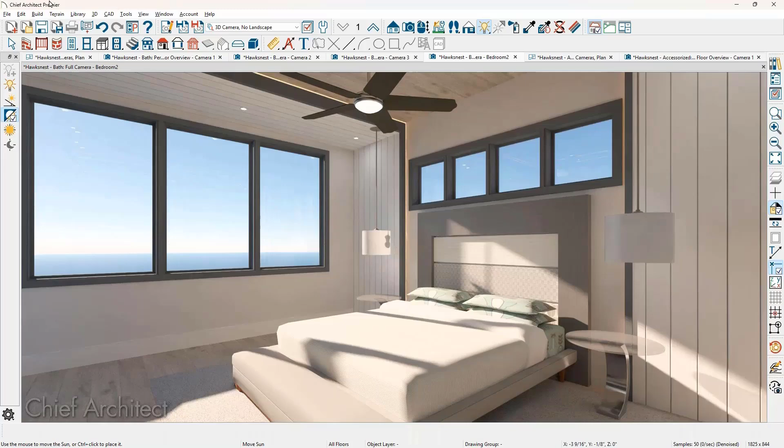Let's go back into the sun. Now you can see that we've actually moved the tilt angle from 4 degrees to minus 25 degrees. So I pulled the sun up, right? It's at minus 25. I also probably changed the angle of it.

Well, now there's this sun intensity - you see that at 100,000? Okay, well, if I'm using a backdrop image, I'm probably going to turn this down, but I'm not using a background image, so I've got it kind of turned up. I'm using what's called a generated sky.

Let me cancel this, and let's go into our backdrops. So I'm using a generated sky, and that is on the backdrop panel. Check generated sky - there's some settings in here for starlight. If you pull the sun down, you can get stars, density, moon, tilt angles, and a few other things. If you have questions about that, click on the help button. So I'm using a generated sky.

Now, if I switch this over and select a backdrop from one of my backdrops - where are we here? Backdrops. Let's just pick one here. So I'm going to use an image for a backdrop. Sometimes it gets different - you see how it now kind of looks like it's muddy outside or a little dingy?

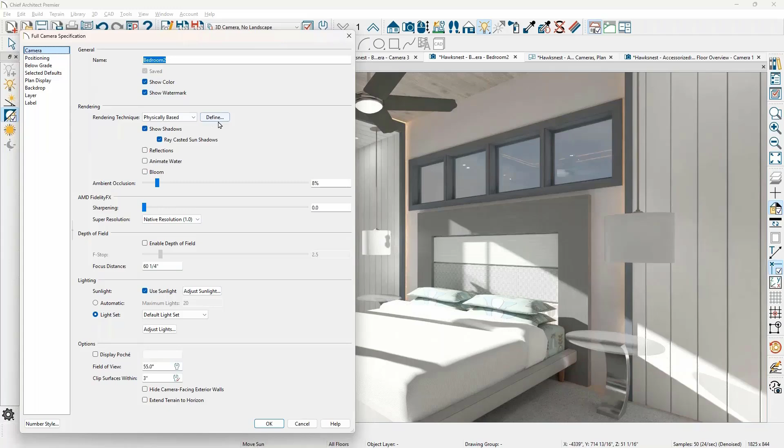Well, okay, there's a few more settings here. Let's take a look at those settings and see if we can dial it in. Let's move back over onto the camera, and let's come down to the camera define option. You see where it says backdrop, daytime backdrop intensity?

So this is how much light is going to be contributed from the backdrop. And that's a function of what kind of backdrop image you have. Some of them are very different colors. Some of them you can actually use as an HDRI image, which can contribute light into the scene.

But let's crank that up to... well, let's lower it to 100 and just see what the change is. So now I'm getting the effects - I still get the sun coming in, but now the backdrop image is much lower.

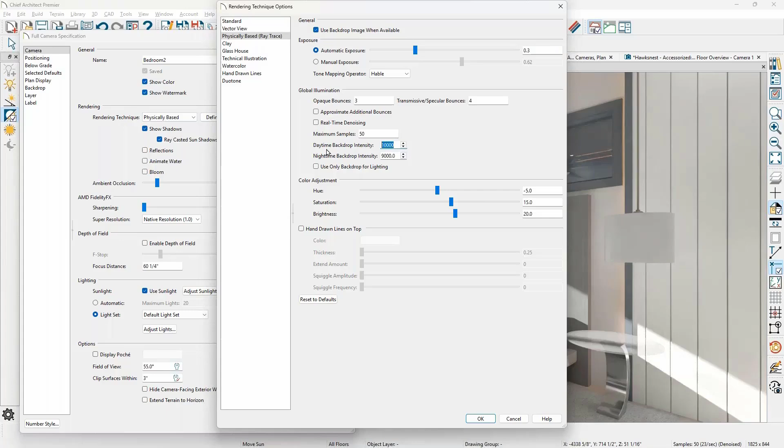And if we flip that from 100, let's go back up the other way and go to 10,000, or well, that'd be pretty - let's try 5,000, see if that works. So a little bit of hit and miss with your images on how you want to dial those in.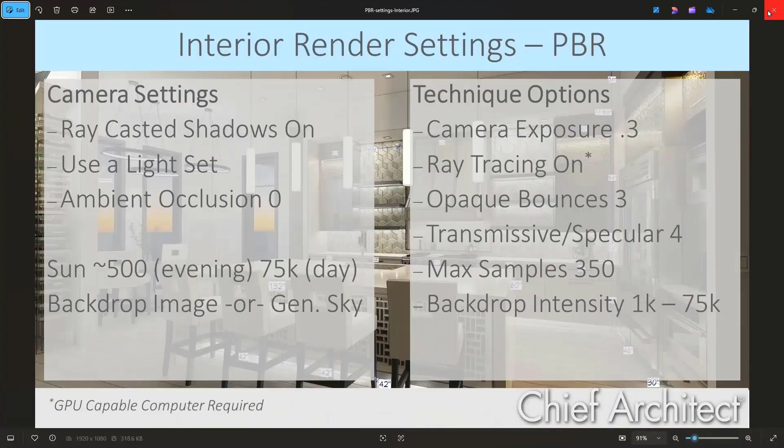You almost answered this question when you were showing the TV set in that bedroom. How do you put an image on that? And just to push the envelope a little bit, could you actually put a video on there? Probably not inside of our program, as far as a video. So how do you put an image on the TV? Well, one, you can find one in the library, add it by clicking once you find the image and adding it on there.

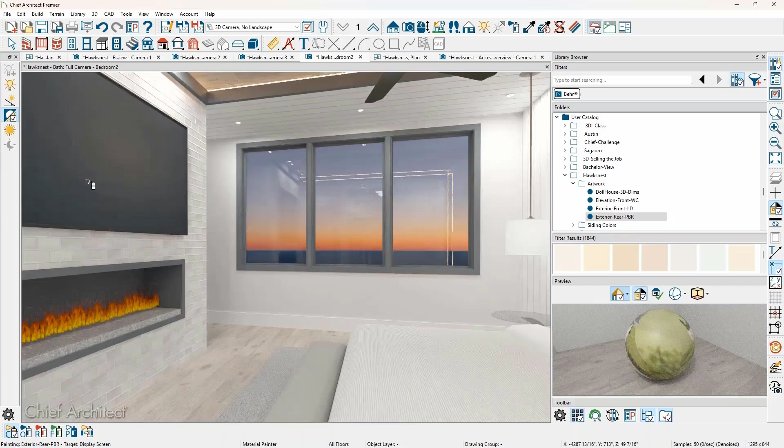Let's scroll down into my user catalog. One of the things I'll sometimes do is take renderings. Let's say I want a rendering of the house itself, and let's see if I can grab that artwork. That looks weird, let me change that. So what I've done here is I've taken a rendering of the outside of the house, and all I did was add that into my library, and then I clicked and applied it onto the TV to do that.

And then you know how to set the emissivity of that, so you can pop it up a little bit. So if I click on that, on the emissivity setting, we'll try 30 -- I don't know, that might be too much. And then that will illuminate the screen a bit. Does that work? That sounds easy.

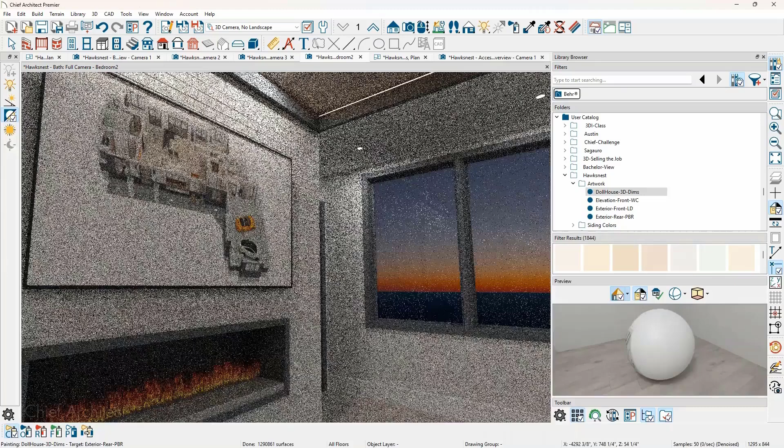So you can import these pictures. You can take one with your cell phone, or in my case, I just exported the rendering -- file, export, file, export picture. And then I've got that on my desktop, and then I can bring that into the program and put that on the TV screen. So I could pull in a picture of the customer or our logo or anything like that. Sure, yep, whatever you want to put on the TV screen, you can just grab that and apply it onto the surface, and then it will show up.

I sometimes put things on there, depending on what it is. Yeah, I think the spray can was what I was missing. Yep, so just open up the library once you've got it in there, find your picture, and then you can click and just paint that on there, whether it's artwork or whatever it is. Thank you. You bet, thanks for calling in.

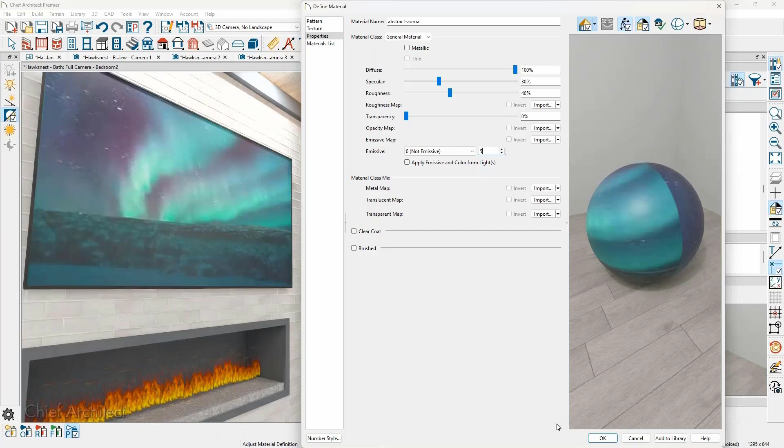And then on the emissivity control is how you would turn on how much brightness you're getting. Sometimes I only turn them on very slightly, even though the drop down doesn't show it. I might just turn it on just slightly because I don't want it to be overbearing in the room. And sometimes I don't even like to use things on the TV screen because that's what people focus on, right?

And this is one of my favorite scenes. I've got a TV screen over here with a Ford GT on it, and everybody knows what a Ford GT is, of course. So being able to -- it depends on what you're trying to accomplish, but your emissivity settings just kind of depend on what your goal is with your render.

Okay, I'll experiment with that a little bit because in some room settings it comes along pretty bright. And then I've also done one of late night TV, and I sometimes use that in an evening bedroom scene because that's when you're going to watch late night TV.

But the local weatherman has kind of become like a signature point on my stuff because who else is going to know who Darrell Winninger is? I don't know him. Yeah, well, you wouldn't because you don't live in Bend. So it's kind of like a little ID thing, you know, this is my plan. It's not your weatherman, it's my plan.

Okay, anyway, I also want to say that I've been using Chief since I think version 9. Every time I watch one of these presentations, I either learn something brand new or I'm reminded about something that I knew but forgot. So thank you very much.

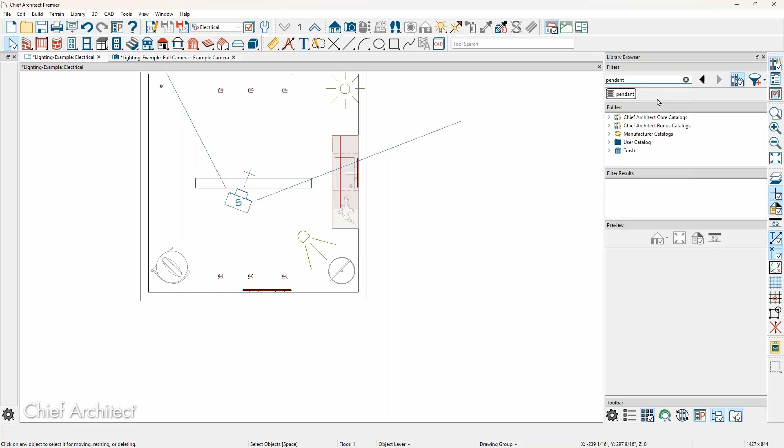Let's open up. Now, John, did you get this pendant light out of our library? I did, yes. Okay, pendant lights. Let's just go and grab one out of the library. And for lack of a better thing, I'm just going to grab this one in here. And let's put a couple in here so we can see.

All right, so you can see that those look actually okay. The base may not be rotated. So a couple things you might check on the light itself. Let's open this up and let's take a look at it. So the first thing is on your 3D information.

Let's see here, where is that setting? Options. So I've opened up this light, and on the options panel, do you see this okay, John? Yes. So I'm on the placement of this electrical light, and right now it's ceiling mounted.

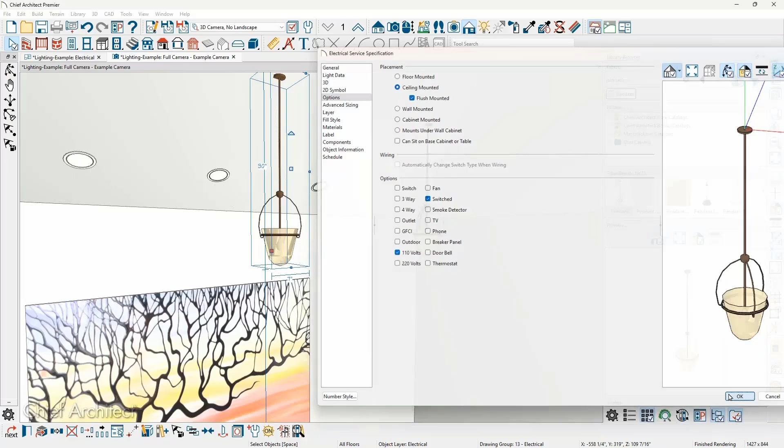Okay, now if I were, let's make it a little crazy. Let's change it to be flush mounted. Let's see what happens. Right? That's like what I saw, yeah.

Yeah, so you might just check that option in the pendant light. Could be maybe one of our lights out there had that setting checked, and you might just verify and check that. I would point you to that first.

Okay. Does that work? It's definitely something to try, yeah. Yeah. If not, send the plan in. We'll have support group take a look at it for you. Okay, sounds good. Thanks, John.

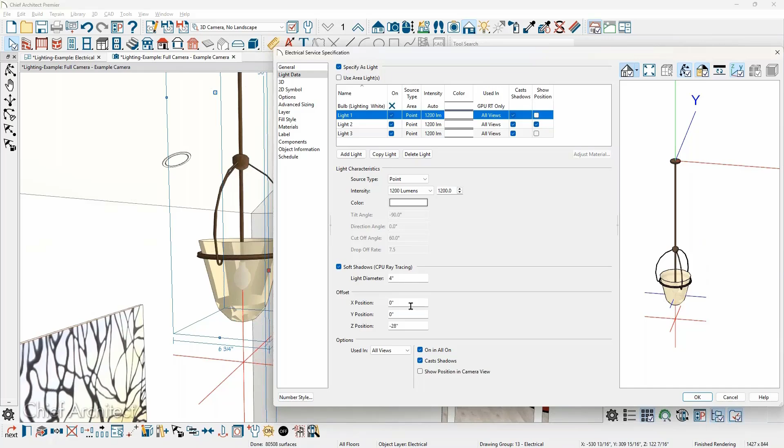showing all of these, but here's all of the different lights. I can just keep adding these and then turning on the light itself. So I've got 3 lights associated with this fixture. Okay, right? Yeah, that's great.

And so when you get a larger light scene, I don't know, well let's see if I have that handy here. This isn't a good example, but when you get a scene and you've got a great big chandelier that's going to span some amount of area, you could add a whole bunch of lights on there, and that way try to illuminate the scene more, and then crank up, if you've got a tall ceiling and that sort of thing, crank up the number of lumens.

Okay, so how do you turn the position of the lights off again in the render so that we don't see it? Where's the button for that? Show position in the camera.

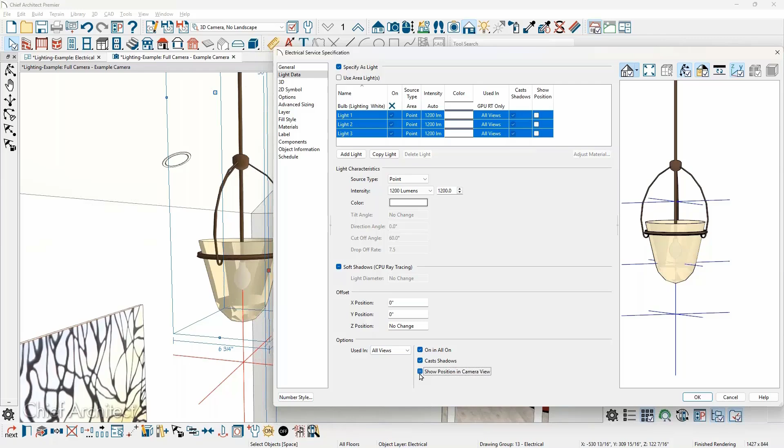Okay, I love it, that's great. So when that's turned on, you can actually see where that light's being emitted from, and it can be helpful to troubleshoot where the light is. If you've got some hot spot, somebody called in earlier with a hot spot from lights, I use this to troubleshoot. Maybe it helps.

No, that's great, it's a great workaround. I appreciate it, thank you so much.

Melissa, the other thing you can do is use fake lights, the ones I pointed people to earlier, where you add lights and you can add those as fake lights. Let's see if I can reset my camera here. So these are fake lights. I've got a fake light toward the dog, and I've got a light in the corner, and what those are, they're not real lights.

Okay, where did you get those from? So that's underneath your 3D menu, lighting, and add lights. Okay, great, fantastic, maybe that helps. It helps a lot, thanks so much.

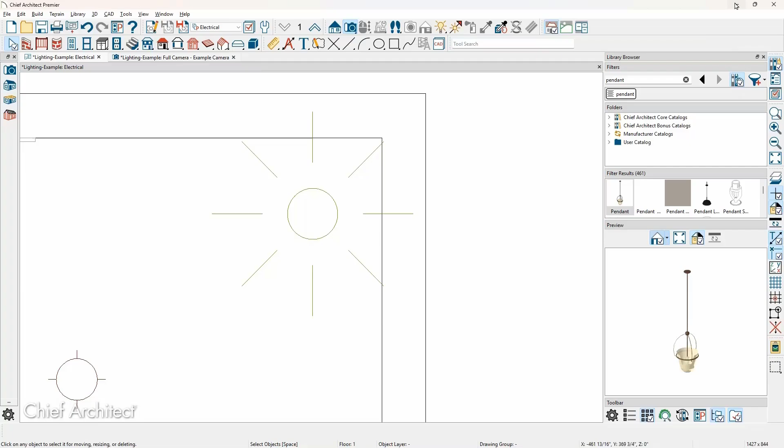So in your material properties, let's flip back over here. Oh gosh, a lot of stuff open. So in your material properties, if I click on this window here, which you can have different, this is called standard glass.

And right now, the information for this - Bill, are you trying to accomplish this in the physically based rendering view, or are you using a GPU ray trace? Okay, yeah, and so this is the physically based ray trace view. I only ask because some people use the standard render view, so I just want to make sure I'm on the same page.

Actually, I had that confused, CPU is - I have an older Apple, so. So you're using CPU ray trace? Yeah, and so when I go into the materials dialog, I'm looking at the same thing you are under transparent, I don't see reflectivity, it says index of refraction. Right. But that didn't get the result.

So if your material is marked as glass, then there are some settings in here. If I change that from transparent, let's just change it to polished. As soon as I change it, the glass option goes away. So I'm going to switch that back to transparent.

Once I come down into the transparent setting, there's the index of refraction. There's a couple different glasses we have - flint glass and crown glass. I think flint may have more refraction or less refraction. And then lead crystal. So you can change the refraction values here, which is basically going to distort how the light goes through the glass.

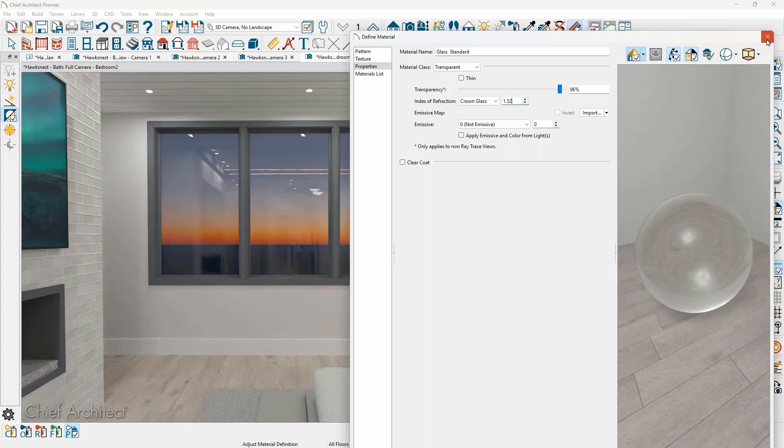There is a transparency setting up here, but there's an asterisk that says it only applies to non-ray trace views. So I usually crank that on my shower glass so I can see it in my non-ray trace, standard views. However, if you're trying to get reduced reflectivity of your glass - actually, I'm trying to increase it. Okay, it's a half mirrored coating they're putting on the glass, and it's a blue color.

So it's been fun to play with the material. What I would end up doing is adjust your room scene so you're going to get some reflection of the sun or something like that. Let me grab this camera real quick. I would probably try to adjust your positioning of the camera... yeah, it's the exterior where it kicks in. I'd probably try to adjust the camera angle so you're getting some reflectivity of something, right?

If I open up this view here, which apparently is going to take a little bit of time. Let me turn off line drawing. I've got a laptop and it's not the fastest, and I like to have line drawing on, but it does take more of my computer than not.

What I would end up doing here - first of all, my camera angle here is kind of top down and I'm not seeing the reflection of the glass, right? So I'd probably tilt the camera so I can see the glass, and then pull maybe the sun information around so it's going to give me more reflection. This is super slow, sorry. Okay, but does that make sense?

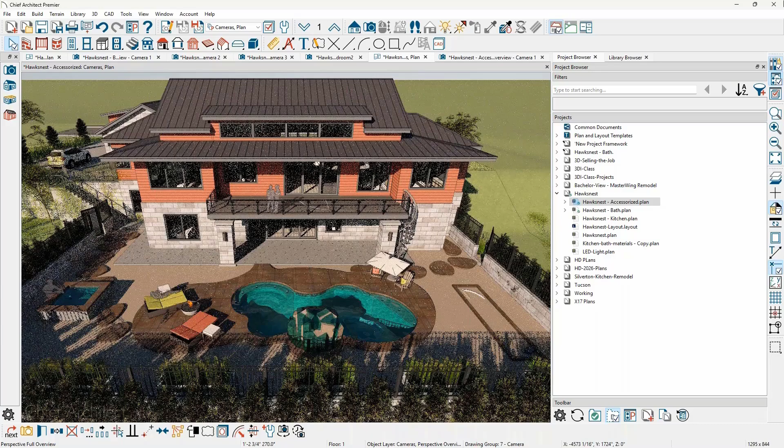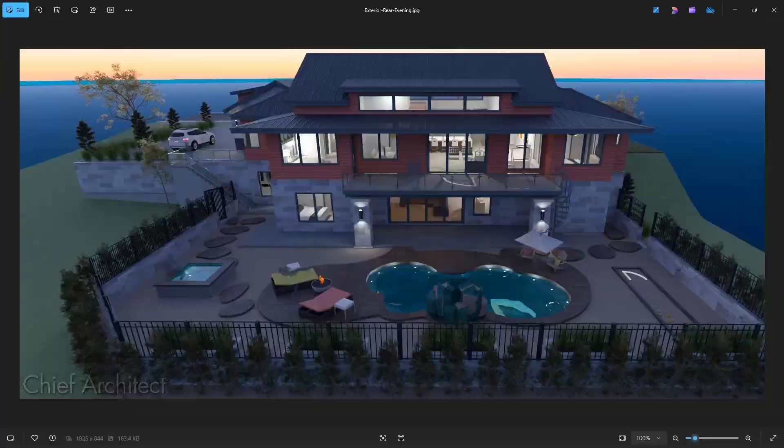So you see how I'm getting some reflection off of the glass in this scene? Again, it's the positioning of the angle of the camera. I know I had one where I've got the pool out back - this is more of a nighttime scene. If I tilt the camera down, you're going to see more reflection when that sun comes off of... I don't have that handy, but you're going to see it come off in the reflection. It's a matter of making sure the angle of the camera is pointed so you're getting reflective surfaces angled at the camera, and your lighting and/or your sun are then reflecting into that glass.

Okay, we'll give it a try. Thank you. Okay, thanks, Bill.